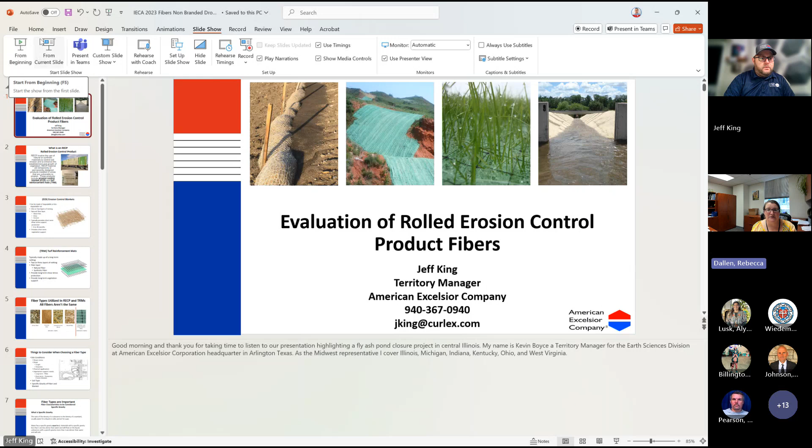Yes, we can see the sidebar also, so you'll want to hit that. Yeah, there we go. Yep, perfect. All right, well, we'll go ahead and get started.

What we're doing today is we're going to be looking at the evaluation of the different types of fibers that are used in your traditional erosion control blankets and turf reinforcement mats. This is all my contact information here. If you think of any questions later on, maybe you don't ask today, that's fine. You can feel free to reach out to me at any time. But we'll go ahead and go through this.

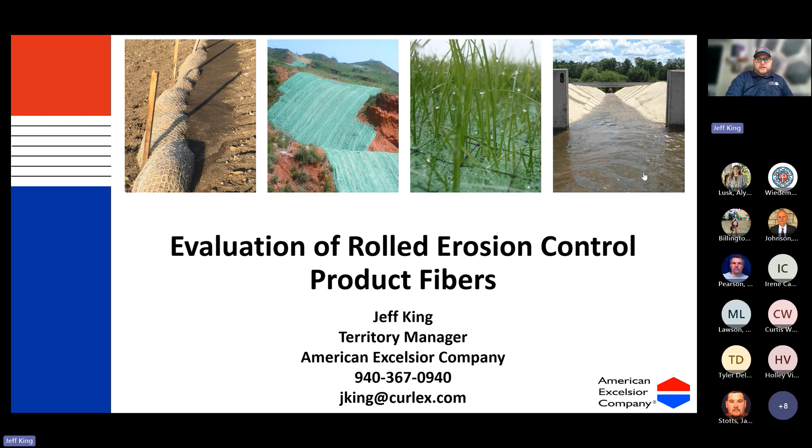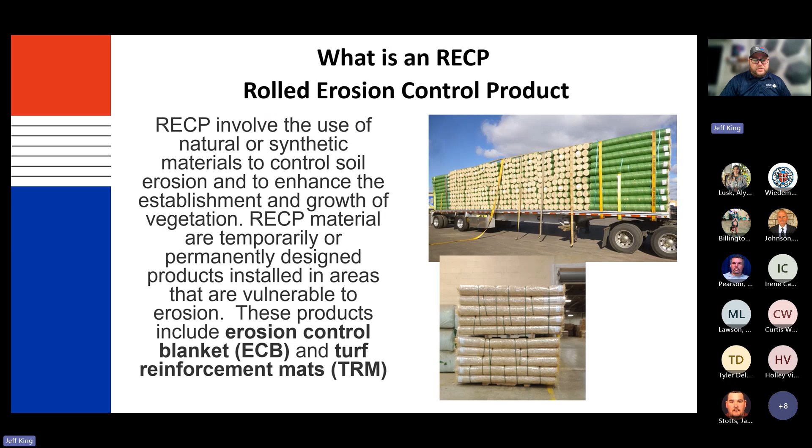So what is a rolled erosion control product, or RECP? These usually involve the use of natural or synthetic materials as a fiber matrix that control soil erosion and also help establishment of growth of vegetation. These are usually temporarily or permanently designed products installed in areas vulnerable to erosion. This includes the ECB, or erosion control blanket, and the turf reinforcement mat.

This is going to give you an up-close look at what ECBs look like, a digital sample that we have. These can be made of degradable or biodegradable nets. Typically the industry standard is a plastic polypropylene netting, but most, if not all, manufacturers of these products also have a biodegradable option, which is a jute netting. One of the big differences is at the junctions of the netting: the plastic netting is fixed or welded, whereas the jute netting is not, so it'll flex on its axis. This helps because it's more nature friendly, with fewer animal entanglements. So having two options for netting is a good thing, especially in more sensitive areas.

These are going to be, basically, 1 or 2 layers of netting, so these are stitch bonded products. You're going to have netting on top, then your fiber matrix, and if it's a single net, you'll have your netting, your fiber matrix, and then the stitching that goes through it.

Or if it's a double net product, it'll have your netting on top, your fiber matrix, your stitching, and then another net. The only difference between the two is the extra net typically, because the weights are going to be the same as far as square yard fiber weight.

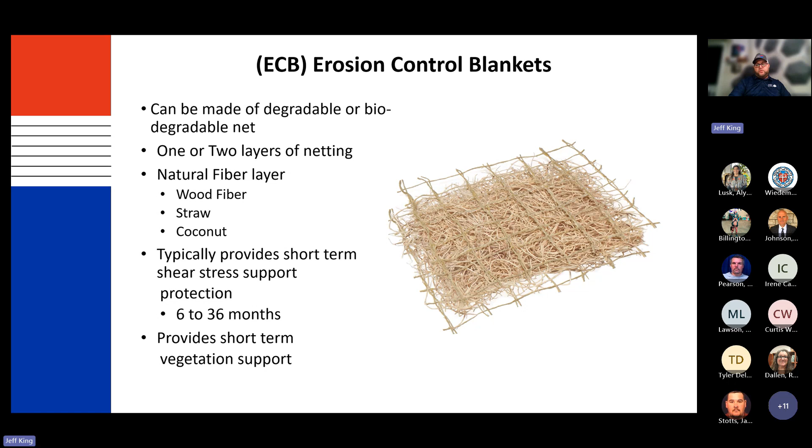Then you have your turf reinforcement mats. These are made up of long-term netting, usually a thick black polypropylene netting. These are going to have 2 or 3 layers of netting. So if you've got a 3-net product, you'll have 2 nets on top with your fiber matrix, and then you'll have your stitching and then your netting on the bottom. If it's just your regular type of TRM, it's usually going to be a double net, so that'll be netting, fibers, stitching, and then netting on the bottom.

And so your fiber layer can consist of natural fibers, which would make it a biocomposite turf reinforcement mat. And the reason it's considered a biocomposite TRM is because you have that natural fiber matrix, which is going to last you roughly 36 months at the most. And that will degrade out, but you'll still have your netting permanently. Or you have a synthetic fiber turf reinforcement mat, and that's going to give you more of a permanent protection. So, long-term shear stress protection, long-term vegetation support.

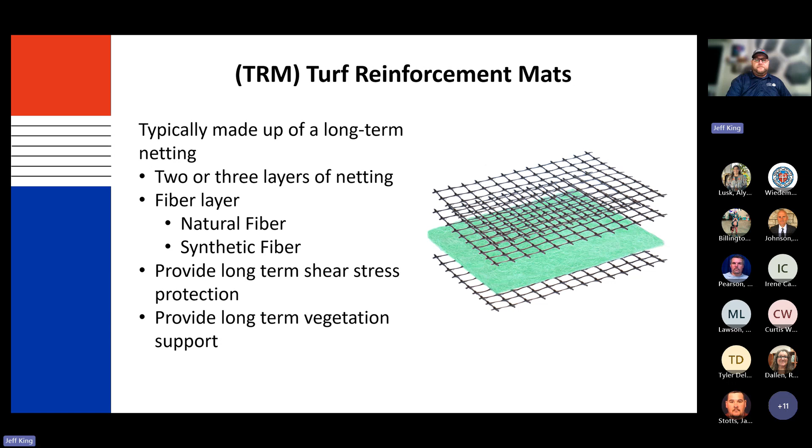So as mentioned, this is just an up-close look of the fiber types that are utilized in these rolled erosion control products and your turf reinforcement mats. If you look on the left, you've got your straw fiber. Notice these fibers are typically flat and hollow. They are a byproduct. You have the coconut fiber, and then you have a blend of the straw and coconut fiber. Usually that's going to be 70% of the fibers metered into the blanket is going to be straw fibers, and then 30% of the fibers metered into the blanket are going to be your coconut fibers.

Now, the industry standard weight for the first 3 types of products is going to be a half a pound of fiber per square yard. These types of blankets are typically 8 foot by 112.5 feet, so they're going to come out to about 100 square yards, a 100 square yard blanket.

And then you've got your Excelsior or Aspen wood fiber blanket. And that's made, these are engineered fibers. Typically, these are cut in a specific way for a specific purpose, like with curls and barbs and things like that. And then you've got your synthetic turf reinforcement mats over on the right. These can be made of polyester or polypropylene. So traditionally, what's used in synthetic turf reinforcement mats in the industry is polypropylene. Our company does make a polyester turf reinforcement mat instead.

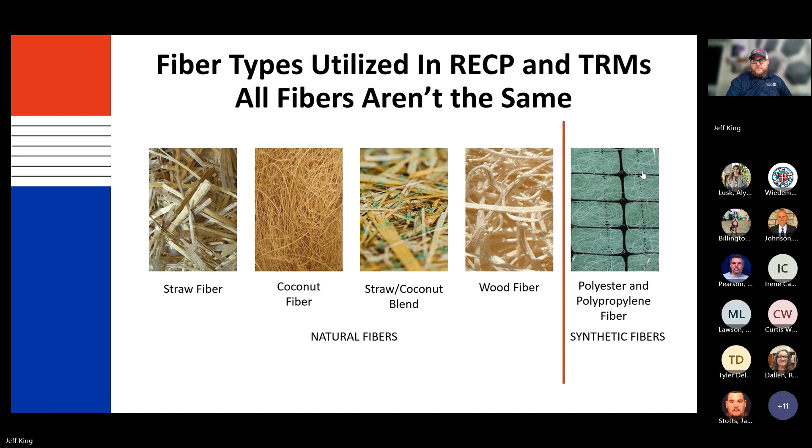Come on. There we go.

So just some things to consider when you're thinking about your fiber type. Your site conditions matter. What kind of shear stress you're asking for, the slope, the length, and the steepness of the slope, that matters. And also you need to consider your vegetation support needs. That's for both channel and slope protection.

So if you're needing something long-term, anything 36 months or more, you're going to need to go with a turf reinforcement mat. Or if it's short term, less than 36 months, you're going to want to go with the temporary erosion control blanket. And then soil type matters. And then, something else to think about, especially in channel applications, is going to be the specific gravity of the fiber and the blanket. And I'll show you why that matters here in just a second.

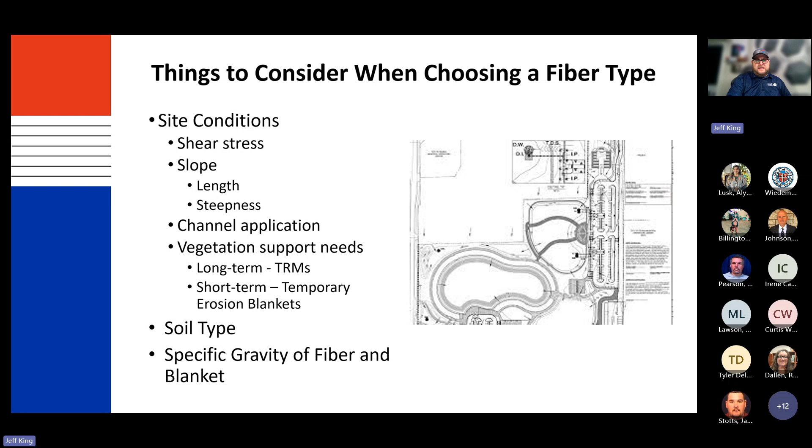So what is specific gravity? Specific gravity is going to be the ratio of the density of the substance to the density of a standard. It's usually water, for a liquid or solid, and air for gas. So water is going to have a specific gravity equal to 1. Materials that have a specific gravity less than 1 are going to be less dense than water, and so they're going to float on the liquid. If your fiber or your blanket has a specific gravity of more than 1, then it is not going to float. It will sink.

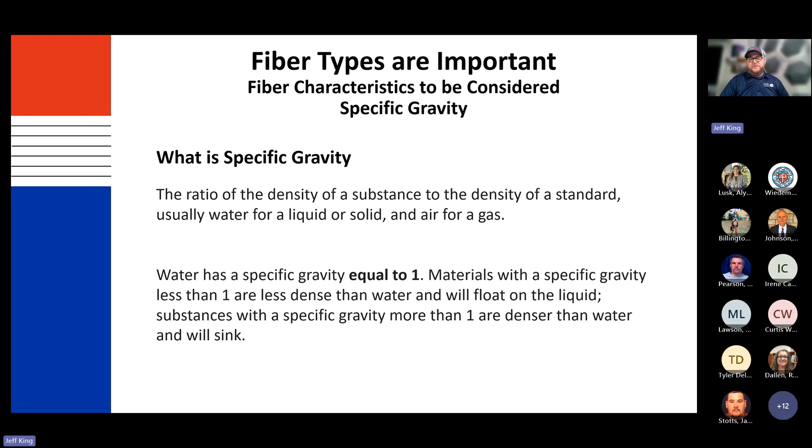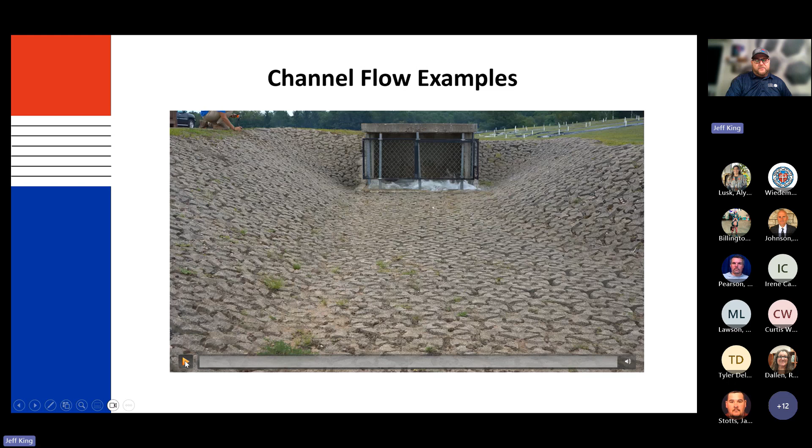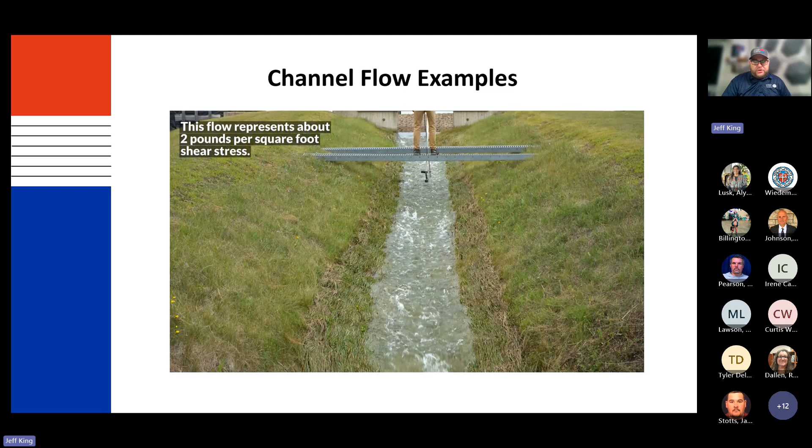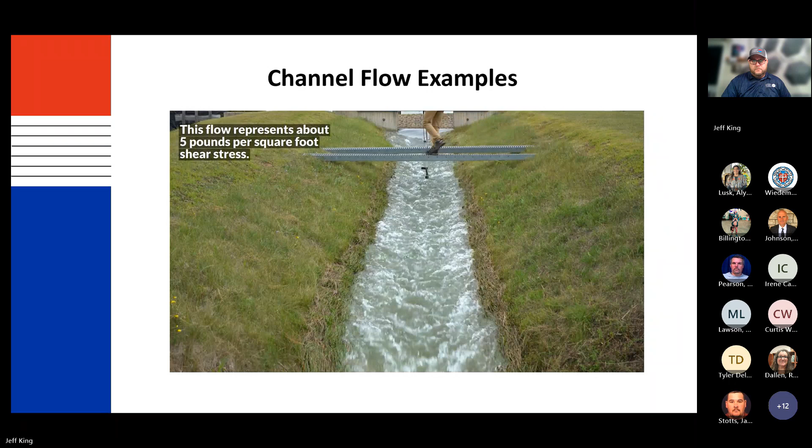Just want to show you, we do have our own ASTM testing lab facility in Rice Lake, Wisconsin. This is one of our flumes that we test in up there, but this is just to give you an example of what some of these look like, some of these shear stress tests. I'm not going to talk through the whole thing, but you'll notice as the pounds per square foot get larger, or bigger, the water gets wider coming down that flume. You can see also the velocity is picking up as well.

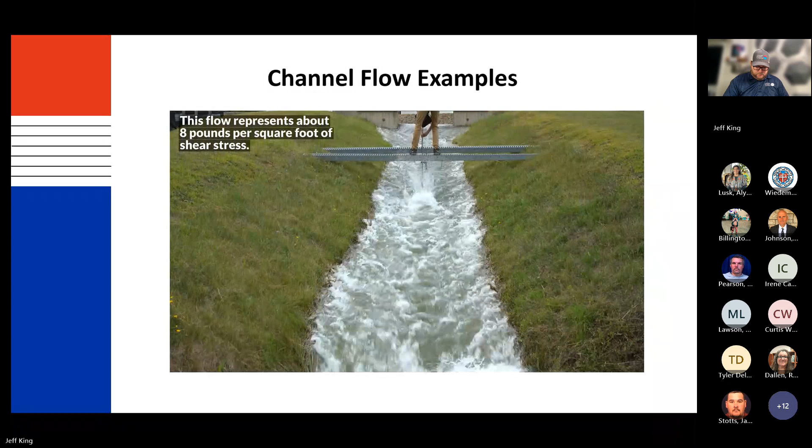So now we'll look at the individual fibers and get an idea of where they come from. Your straw fiber is a byproduct of agricultural activities. This is typically the least expensive fiber type used in an ECB.

It does have the potential to contain some residual seed or weeds. These fibers are typically flat, hollow, as mentioned earlier, and they are brittle as well. They have a specific gravity less than 1, so they're going to float.

I'll be able to show you an example of that. From a longevity standpoint, which is really important to consider when designing a project or putting your blanket down, you want to think about not only slope gradient and soil type, but also how long you want that product to last. So the functional longevity of it does matter.

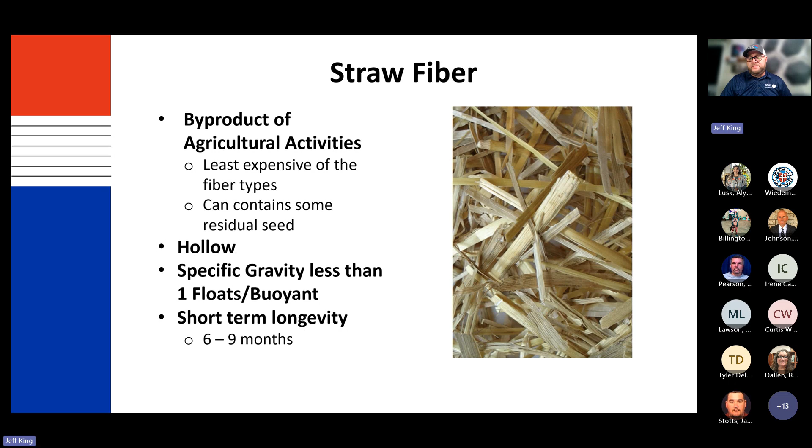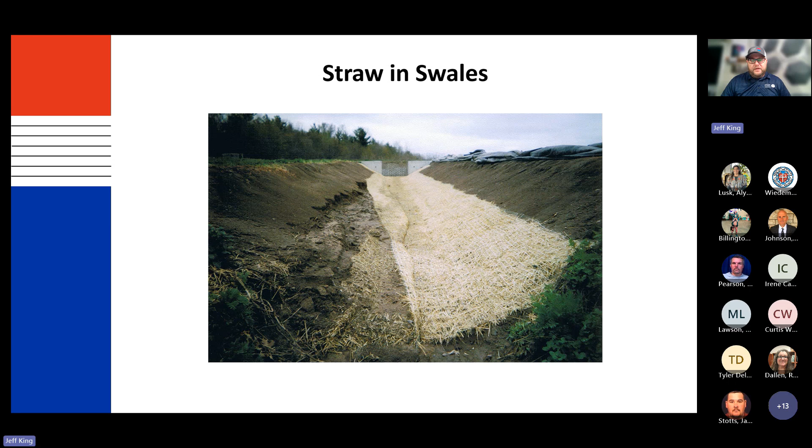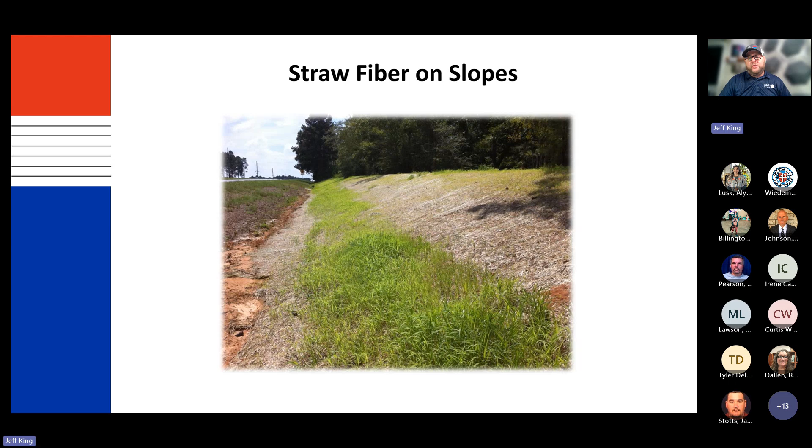So something to consider. Coconut fibers give you up to 36 months of longevity. These are imported from Southern Asia, and unfortunately that gives a poor carbon footprint to get it here. They process and collect these fibers in Southeast Asia, load them onto a large container, and put it on a boat that has to sail from there to North America.

Because of that, this is a non-native fiber matrix to North America. One of the other issues we've had with this fiber is availability, since piracy has been a problem along the route at times. So we've had delays in being able to get our coconut fibers to make these types of blankets.

They are dark in color, so because it's dark, it can actually cause seed burnout before you ever get germination. It also has a specific gravity of less than 1, so like the straw fibers, this one will also float.

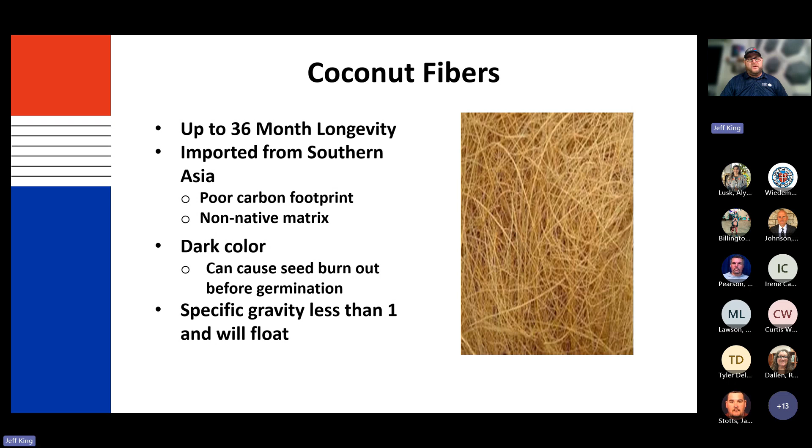Just wanted to give you an idea of what a coconut blanket install looks like here in a swale.

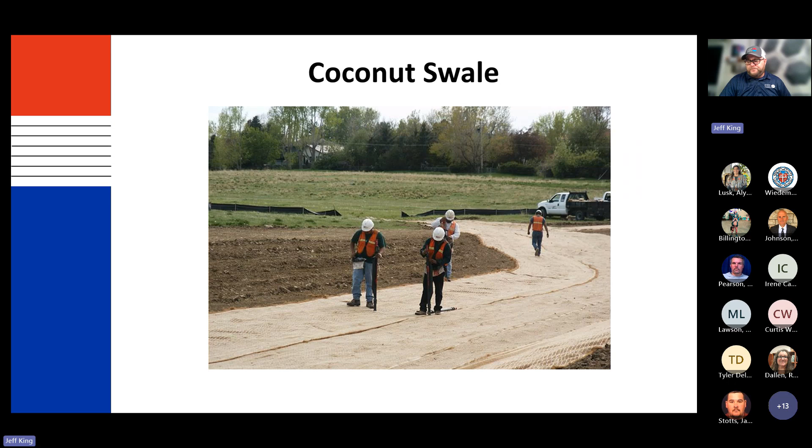Next you have the aspen wood fiber. This fiber is naturally seed-free and native to North America. There's Great Lakes aspen, which is what our company uses, and then there's aspen stands out west.

Fun facts about aspen: one, it's not actually a tree—it's considered a weed or invasive. And at one point, the largest living organism in North America was an aspen stand, which I believe was about 17 square miles. It's probably much bigger than that now, so that might be kind of old data.

But anyway, if you've seen the movie A Christmas Story, when Ralphie's dad collects his very special award—the infamous leg lamp—and he busts open the crate and pulls the lamp out, there are fibers in there. Those are actually wood fibers, Excelsior wood fibers, like the Curlex fiber.

These are engineered. As mentioned earlier, we curl these and put the barbs in. We cut them with a specific type of blade—we basically engineer these fibers for this specific purpose.

Another benefit of aspen is it holds its weight in moisture. Because of that, they actually use it for swamp coolers out west or in the Middle East. We have a wood fiber division, and they use these pads in the swamp coolers.

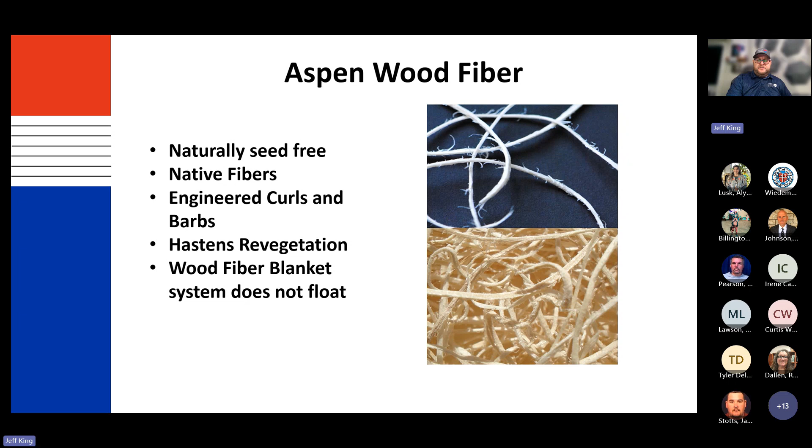Another thing I want to show you is what these fibers do over soil irregularities. One of the most common soil irregularities on a construction site is track voids. On the left you'll see straw fibers over the track void, and on the right you'll see the Excelsior fibers over the track void. We spray both and get them both wet, and then I'll let you see the results.

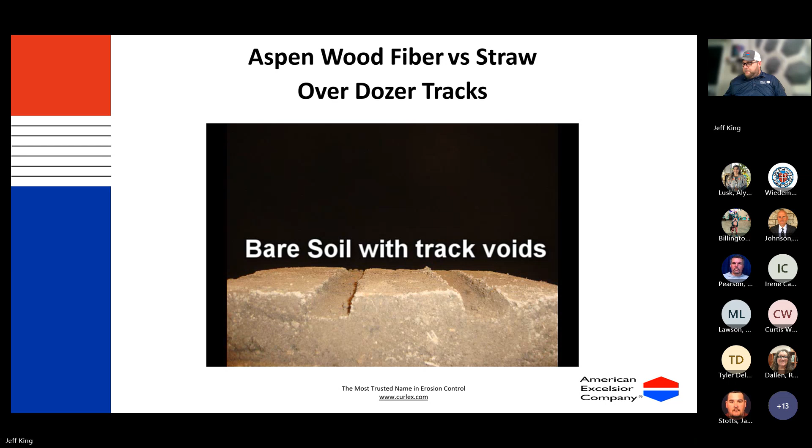You can see the straw fibers don't really do anything, so you still have that void underneath your blanket. If you've got that void, that means you have a potential weak spot and a chance of having some erosion underneath it. Whereas on the right, you can see the Excelsior fiber puffs up when it gets wet.

If I did this presentation in person, I have a cool little kit with about a 6-inch pad of Excelsior that I would spray at the beginning, and then show you how thick it is when I'm done. You can see in this time-lapse video how it expanded up and then went down into your void, so you have less of a weak spot there.

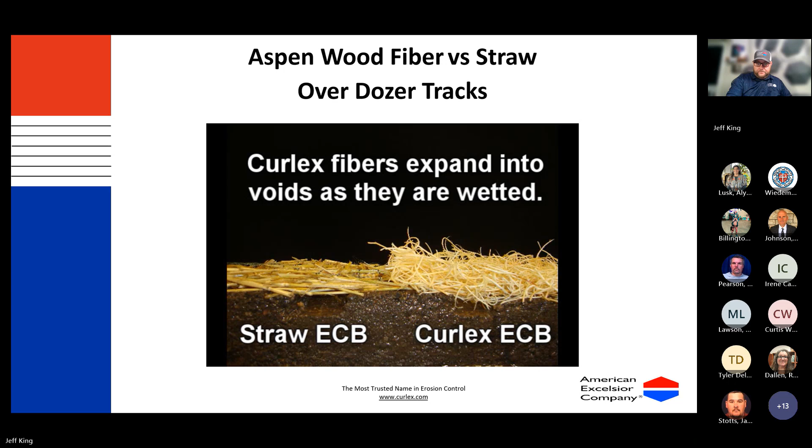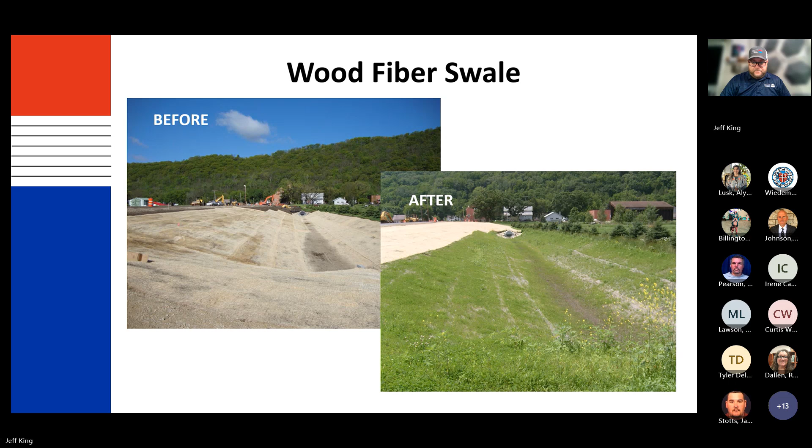This is what the wood fiber products look like on a slope. You can see no seed migration here—even distribution of vegetation, and everything looks nice and green.

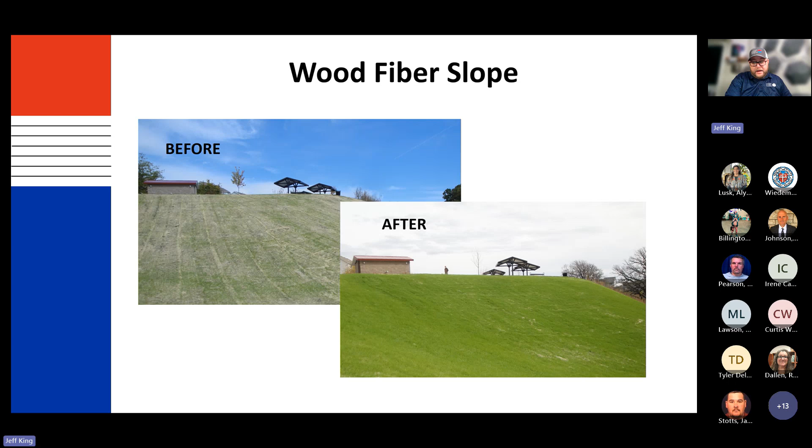That had to have been not here in Texas, and definitely not after the month of July, because everything's pretty much brown here after that.

So this is the comparison I wanted to show you. Just a little background: both of these products are ours, and both were installed to manufacturers' recommendations. We want to do things the right way and not skew the results in any way.

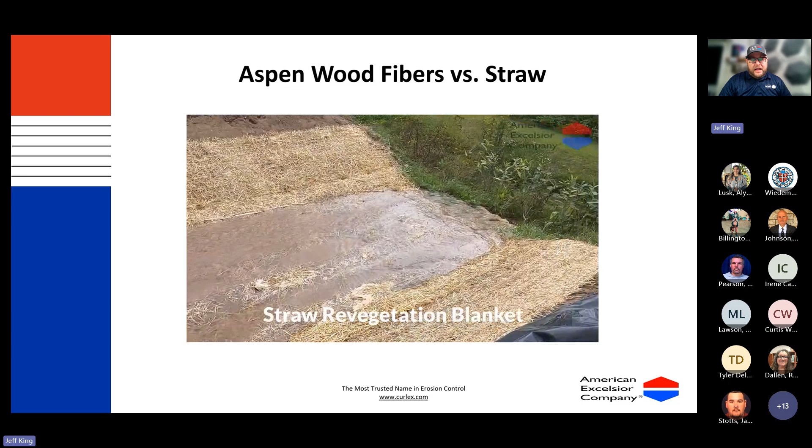I'm just going to press play on the video here. You can see as the water rolls down the swale, the fibers lift up because of that specific gravity being less than 1. And look at the color of the runoff—that means you're having erosion underneath where that product is.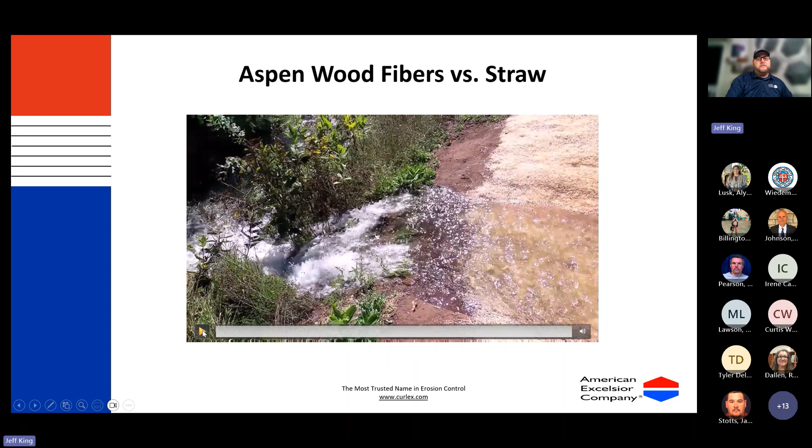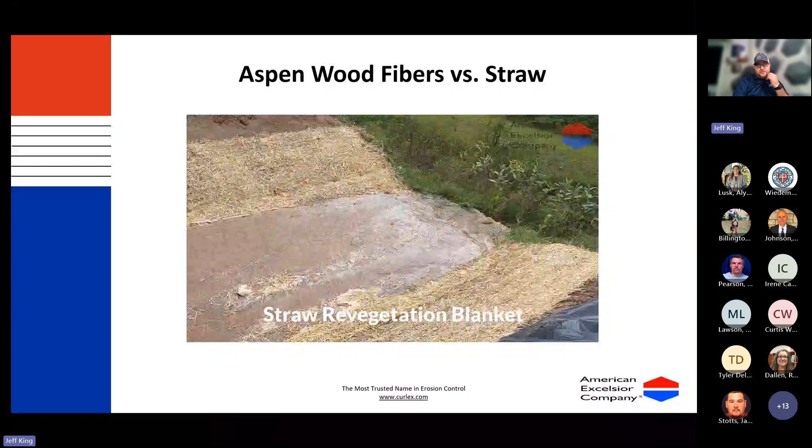We're going to watch that again. And it's not like that's a gully washer flow rate either—that's almost like a trickle, if you ask me. But yeah, having runoff that color, that's not good.

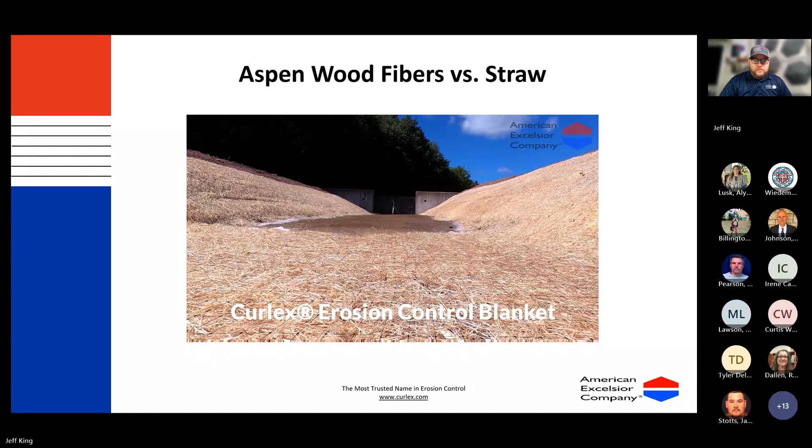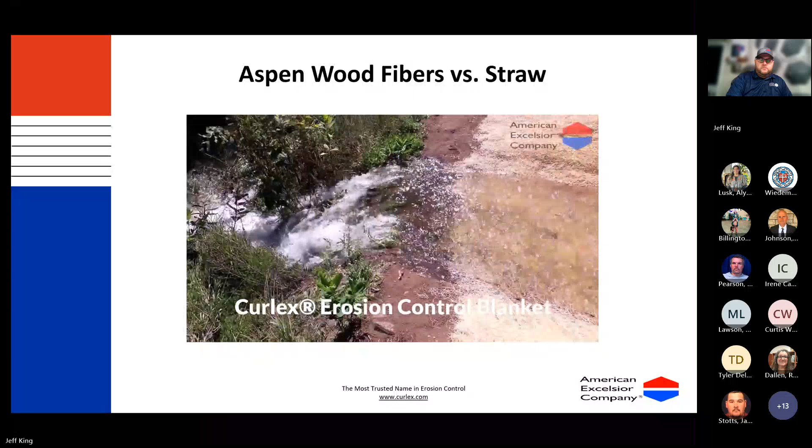Great Lakes aspen fibers filter out contaminated runoff. They filter out hydrocarbons, things that are often components of asphalt, fuels, oils, and those kinds of things. That fiber is used not only in rolled erosion control products, but also in sediment control devices, so something to consider for your perimeter control and stuff like that.

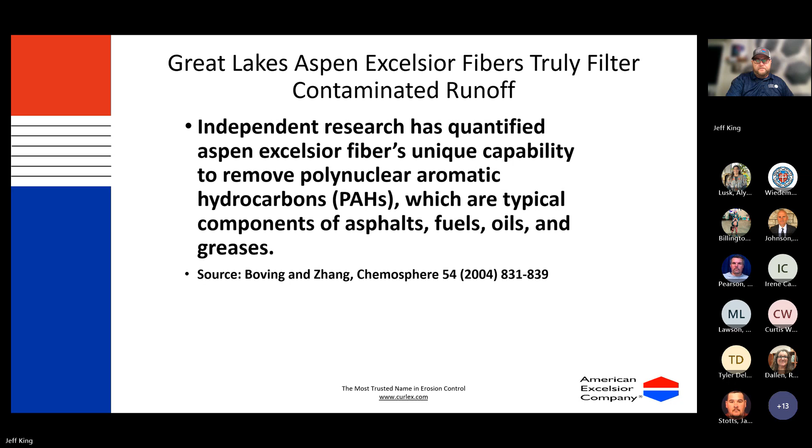TRM equals turf reinforcement mat. This is always going to contain at least some permanent components, but it can also contain a degradable fiber matrix, which is what makes it that biocomposite I was talking about earlier.

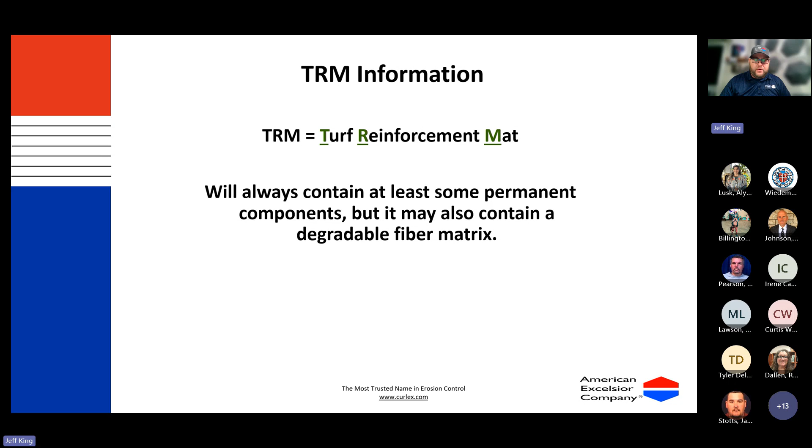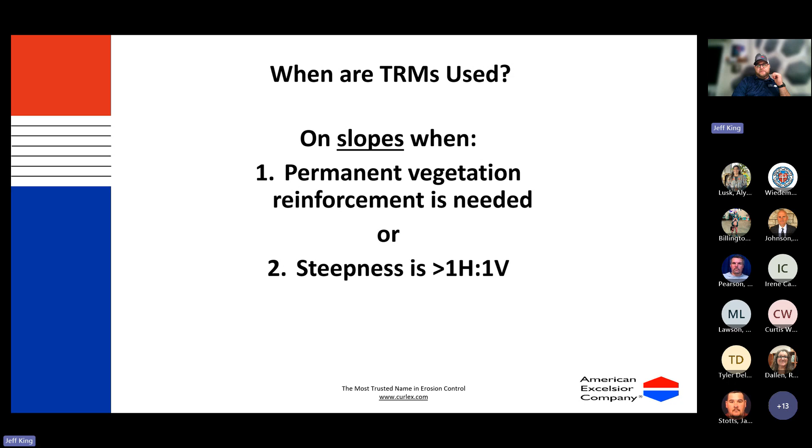So when are TRMs used on slopes? They're typically used when you want permanent vegetation, or if your slope gradient is steeper than a 1-to-1. And then in channels... actually, never mind, I'll probably go over that next. I might have gotten ahead of myself here.

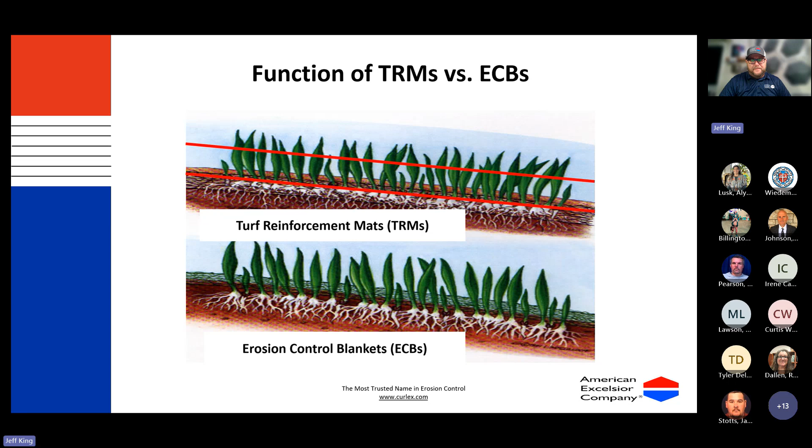As mentioned earlier, these are usually made with synthetic fibers when you want long-term vegetation support. They give you high shear stress applications - I think our highest rated one is about 14 pounds per square foot shear stress.

There are two types of fiber sources when it comes to synthetics. Ours is polyester, so it's considered a post-consumer good - it's made out of recycled soda and water bottles. It has a specific gravity greater than 1, whereas typically the turf reinforcement mats you see in the market are polypropylene based. These are virgin plastics, and they have a specific gravity less than 1.

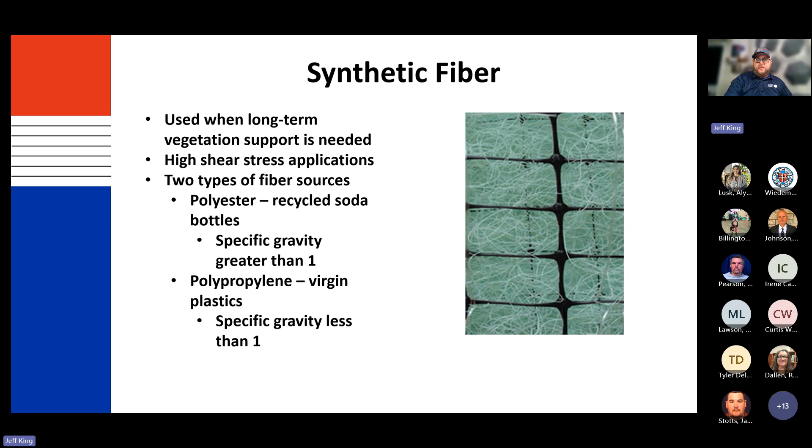So meaning during a hydraulic event, if it's not anchored down properly, it can float. I'll be able to show you that here in a second. These offer really good support in your swales - you can see here at the bottom, a fully vegetated swale.

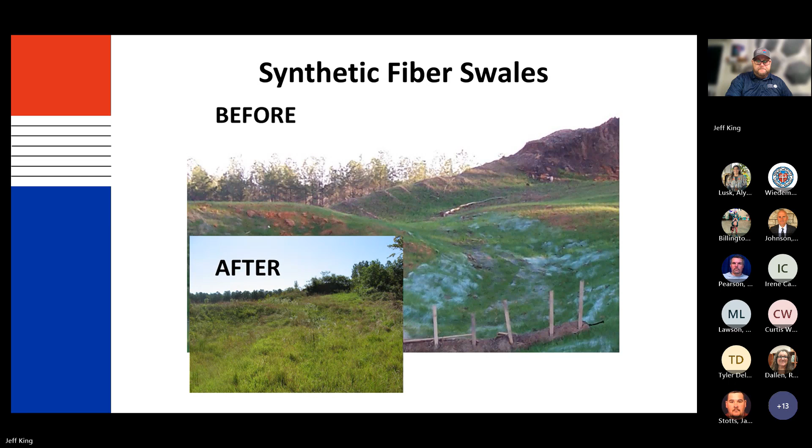So this is what I was talking about, floating. I'm going to just show you the difference. You have the polyester-based product on your left, and the polypropylene products on your right.

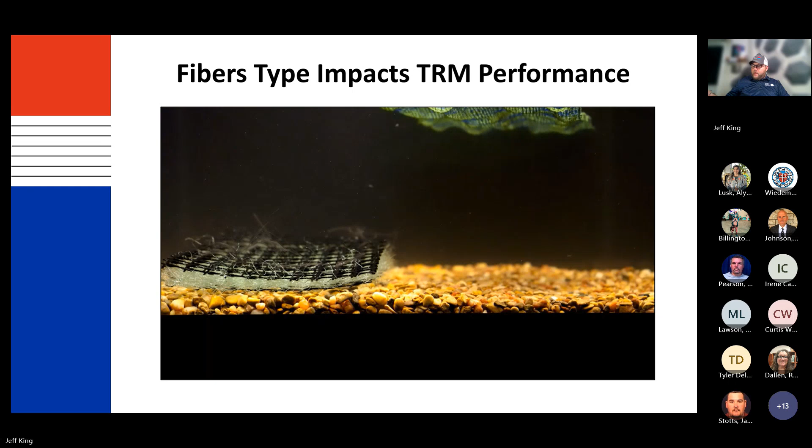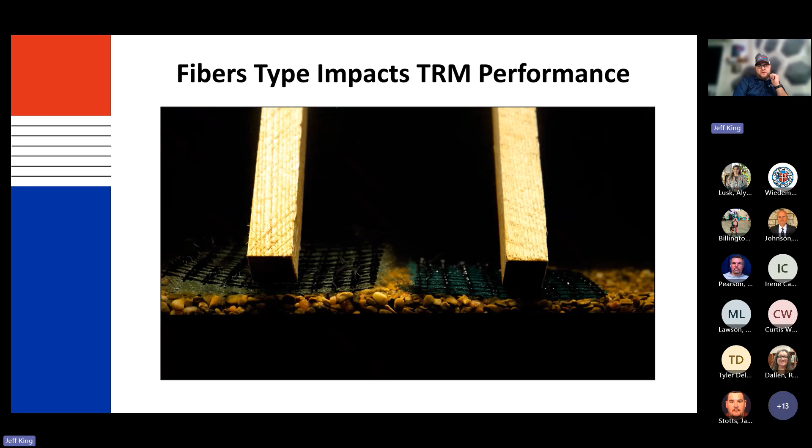As mentioned before, if your product floats, or whatever device you're using floats, that means you've got a weak spot under where that BMP is supposed to be. You really want to make sure that BMP has intimate contact with the soil.

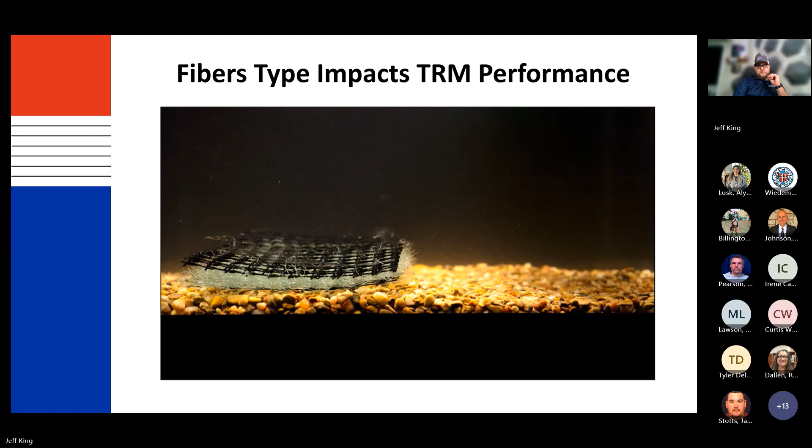So your fiber type is going to be important, and which ones float. Going from left to right: I showed you that straw fibers float. I didn't have a video of coconut or straw-coconut blend, but I can assure you they float. Your polypropylene-based synthetic fibers will float. The aspen wood doesn't float, and neither does your polyester synthetic fiber that's used in some TRMs.

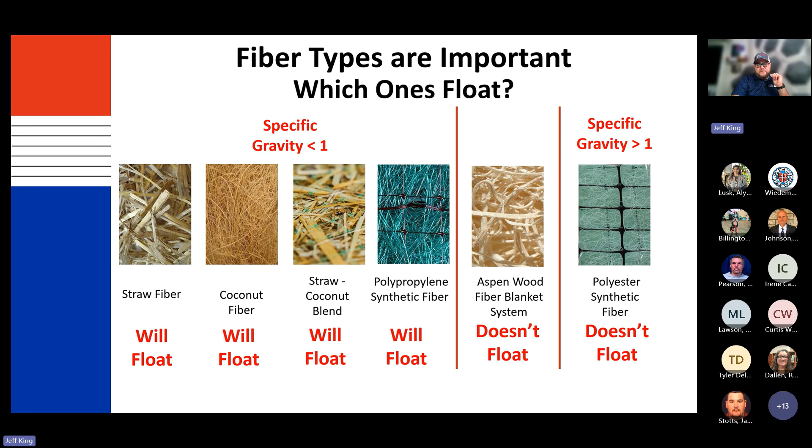So we're kind of ending up here. To summarize, your fiber type selection is going to be critical to how successful that installation is. Especially in channel applications, you really want to think about specific gravity, because something I didn't show here that's in one of our other presentations is that if your synthetic product ends up floating, a lot of times debris will come down these channels and you run the risk of that debris latching onto the floating TRM and ripping it up, ruining that installation. So just something to think about.

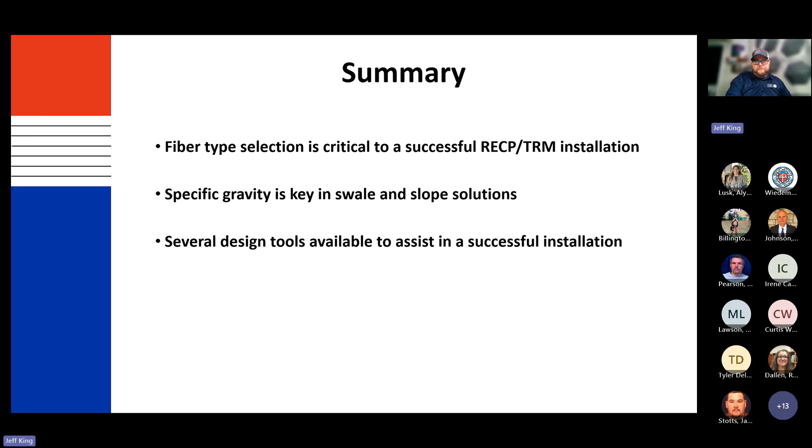Great, we do have a few questions. Alyssa asked: have these been tested with native vegetation rather than grass? Some of the native vegetation types require light to germinate. Is there any negative effect?

Yeah, we've tested them all over, and obviously it's going to depend on the native blend, and the native blends are going to be different depending on where you are. So a native blend here is going to be different than a native blend in Colorado, but we've tested, and in the industry in general, tests at TTI, which is on the Rellis campus, usually they're unvegetated tests anyway. But we test our products at TTI, which is down at Texas A&M on the Rellis campus.

Which is a really cool facility, by the way. TRI, I believe Utah State has some testing, and then Colorado State. But also, something to think about: I know Jamie Schussler up at Oklahoma State has a research lab, so you'll probably be seeing a lot of different products being tested for different things up there in the near future. That'd be pretty awesome.